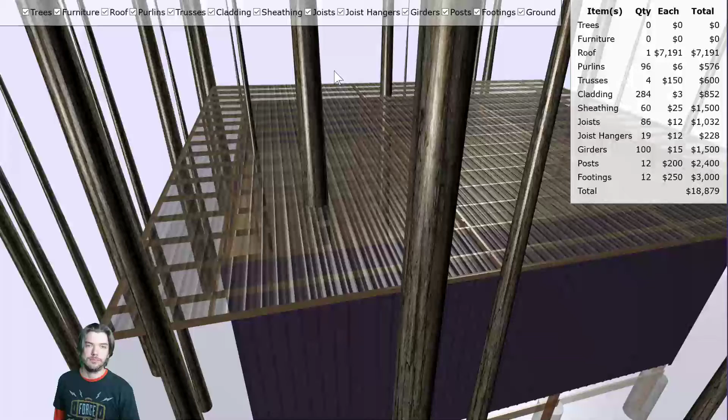When I estimated in my head what my material costs were, I said 15 to 20,000, and after I thought about that, I couldn't believe that that's what it would really be. I thought maybe I had seriously underestimated, but you can see on the screen, 18,879. When I saw that number, I thought, whoa, that's so close. I don't even know how I knew what that would be, maybe just kind of tallying it all up in my head and figuring these things cost this much.

I got an estimate for a pole barn from, I think, Hansen, and it came in at about 14,000. The materials I'll be using are going to cost a little bit more, and I'll be buying each one. They probably get a discount. So I don't know, it came out to be about right.

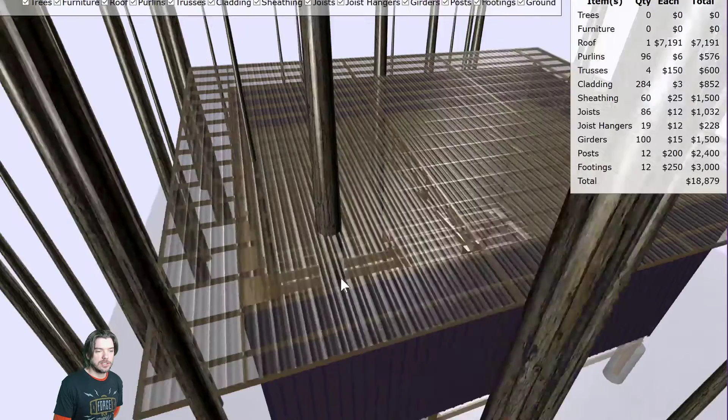Now, of course, there's still a lot left to be calculated. I don't have the flooring in yet. I also don't have insulation, or doors and windows, or plumbing, electrical, all that. So the price is going to go up beyond this quite a bit. But it's incredible that you can build something so big for what doesn't really seem to be a big amount of money compared to what it would cost to buy a house. So I'm pleasantly surprised by this number, and, I don't know, it sounds immodest, but impressed, like whoa, all right. So I think I'm on the right track.

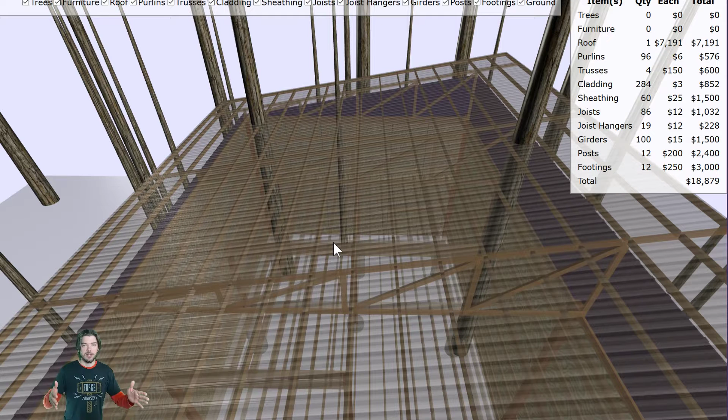I don't know what this would have cost to build using traditional building methods. I know for one thing, the foundation would be quite a bit more expensive. A full perimeter foundation would likely cost at least 10 grand, I'm thinking, because you have to trench the whole thing very deep and wide, and then you have to fill that with concrete. You have to hire pumping trucks to come in and put the concrete in there. So a full perimeter gets quite expensive. Plus, a full perimeter foundation would be really bad on the trees around it.

I'd have to cut the trees back really, really far. But I decided I'm either going to do just a regular pole barn and have these concrete footings you can see here, or I might use what's called a diamond pier. Let me see if I have a window for diamond pier up. I'll get it for you. Give me just one second.

So these are diamond piers here, and it's really neat. What they do is, each one of these... notice the pins here, they actually pin them into the ground. So you have these concrete blocks, and then inside each of these holes, in 4 different angles, you basically use a jackhammer, just like in the picture, to pound these pins into the ground, and that keeps them from moving. The pins are kind of like this, say, and the block would be here, so it can't move like this. It's pretty cool.

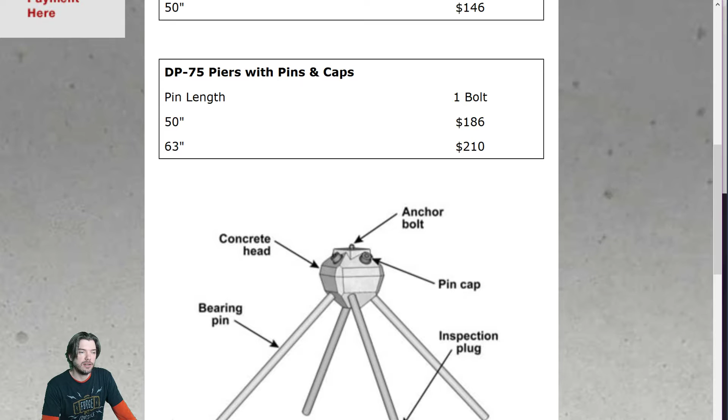So how did I come up with the pricing? Here, on the most expensive residential one, I might have to get something bigger than this, but here is $210 each, and I'm gonna have one for each post. Commercial pricing is a little bit more expensive. I'm not sure if I'll need to go here, but a pin length for a DP 100, here's about $250. It might go up a little bit more. And then in the code, what I did, I put a cost for each item in the check boxes at the top, and what the price will be. And here's the link to it. So the trusses I put at 150. Let me show you that page.

Security check. Seriously? Weird.

So the truss is here, a 24-foot truss. I mean, it says 74. I'm going to have a shed roof, which the pricing might be a little bit different, but at the same time, I thought if I overestimate there's only 4, so if I overestimate even by double, that should be okay. I can live with that.

Let's see here for cladding. I wasn't sure on that. I might need to change that, priced quite a bit. Board and batten siding. Will it load? Doesn't look like it'll load.

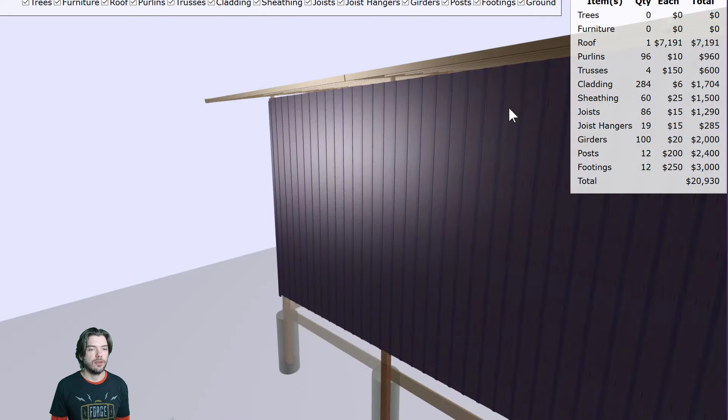I need to add another number in there for the labor. 21,000. Okay, so a little bit more. Now the labor generally is double the materials, so for about 40,000 I could get this structure built, I think.

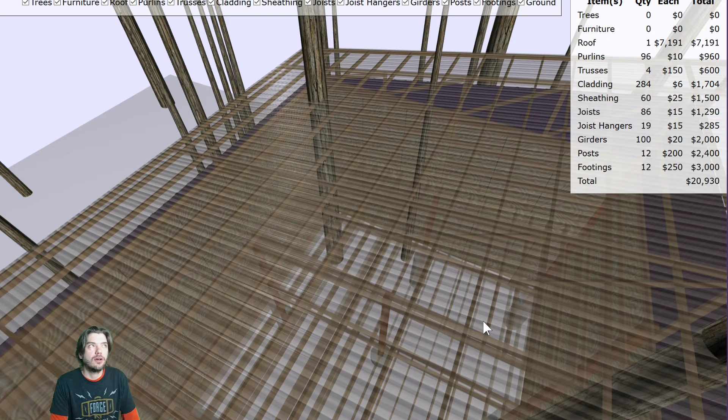What's that number? $1,200? No, half that, about $750. Another $750 for plywood floors. Plus more, actually. So let's say about $1,000. So $22,000. And then, I mean, you could live in that.

You wouldn't want to live in that. You wouldn't have a toilet. That wouldn't be nice. You wouldn't really have electricity. Maybe if you had a grill. It's better than camping though, right? Maybe get a porta potty outside until you get the plumbing in there.

So I need to know what the plumbing will cost. Not really quite sure what that. It's going to be very simple though. There's going to be a kitchen sink and a bathroom sink, and a toilet and a bathtub. So really only 4 fixtures. That's not really going to be. Should I have a bathtub or just a shower? I'm not sure. It's kind of nice to have a bath every now and then.

All right, and then let's see here. Trusses, right? Purlins. These are the purlins.

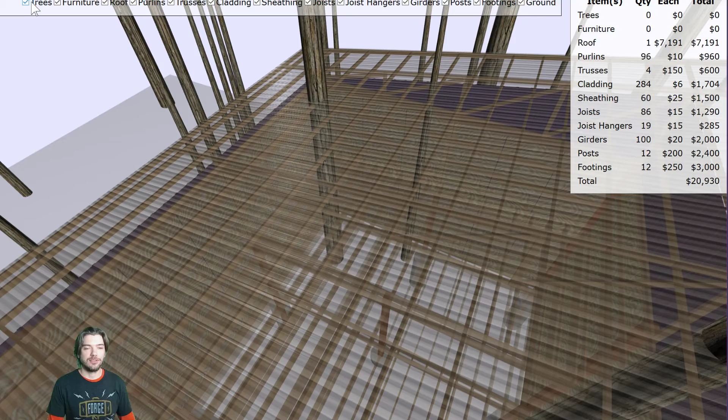It's weird. It's like every time I get closer to the real house with the virtual house, I get a little more anxious to actually build it. And it's so strange. I guess in a way it's good to slow down.

I realized yesterday too my trusses aren't being built right. But I don't have any control over those trusses. I'm going to have to buy them pre-engineered. So as long as they're there, it's fine. I could, of course, not build this second floor. Then it'd be just a really tall space.

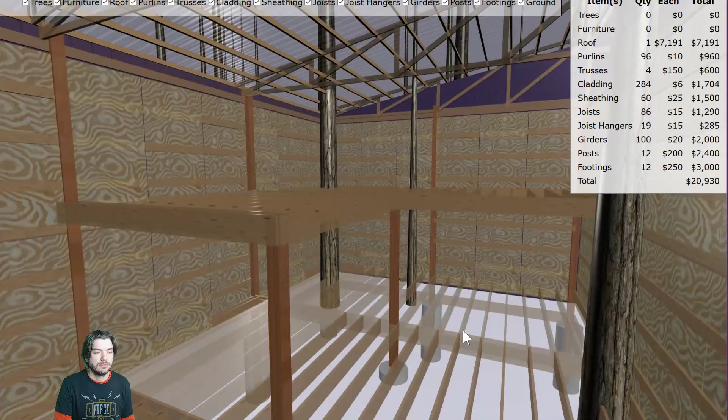I feel like you have to build your own house in your life. I feel like that's a requirement in order to be a human being. Maslow's hierarchy is, at the bottom, shelter. And we go through life living in these houses, just letting somebody else build them for us. We don't even know what goes into building a house, or what it takes to build the thing we're living in. How complicated is it? What is it?

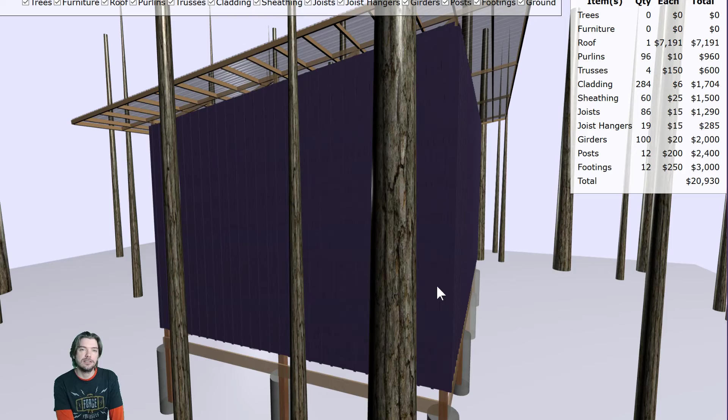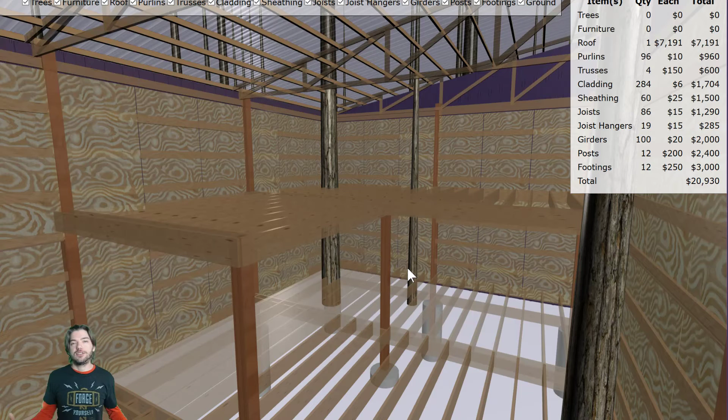I think it's going to be really nice. I've renovated a house, so not knowing what's behind the walls, or having to deal with somebody else's mistakes and shortcuts - I mean, there are always those there. It's the same in programming, really. It's really similar to programming in many ways. We even have analogies in programming, like 'I just got to plumb it together' or 'I need to wire it up,' or software architect versus traditional architect. Both are called designers.

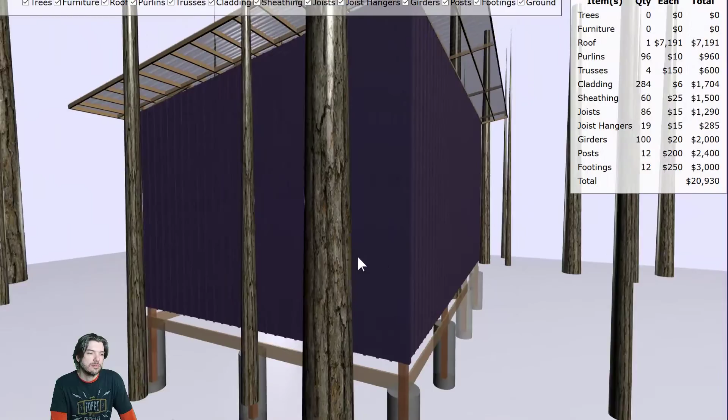I guess I need a door. Door's about $300.

My goal is I want to design a house that will cost about the same to build as a typical down payment, because that's what people generally save up, right? So if they can generally save up a down payment to buy a house, then what if you could actually build your house with that?

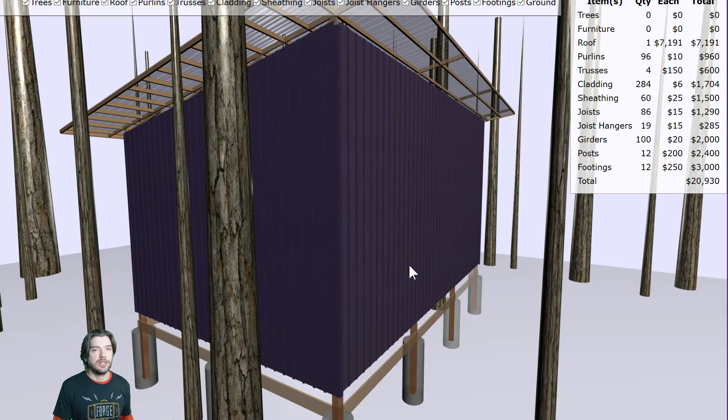Assuming, of course, you put in your own labor. And you have to buy the land as well. There's a bunch of other costs here too. Oh my gosh, it's so expensive. Houses are so expensive. I have to get a septic system, I have to get electricity put on there, I have to get water.

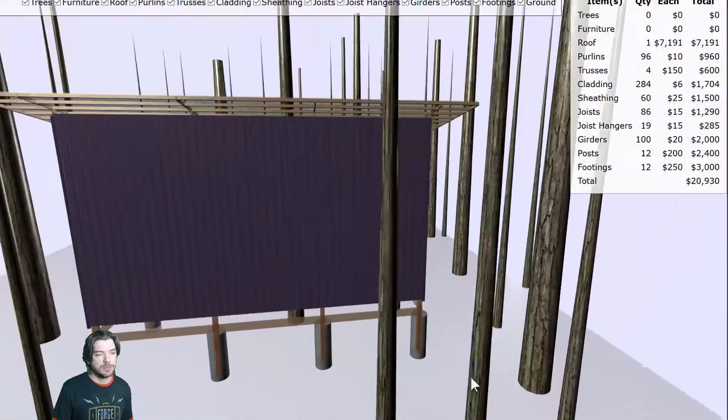Maybe I should add an item for each of those. Where I am, water's really expensive to get. And a septic system is about $15,000. So it's expensive.

Houses are really expensive. The roof is the most expensive part, which I guess is important because it protects the entire house. And a metal roof is going to cost a little bit more. This is for the metal roof cost. Where did I get my metal roof cost? Let me find that. Roof.

Will it open? So here we go. Typical roof costs run from $4.50 to $11 per square foot installed. So metal roofing costs range from $150 to $550. I took the high end of the range there. I knew it was going to be - roofs are really expensive. But metal's going to be the best, especially in an environment like this, Pacific Northwest.

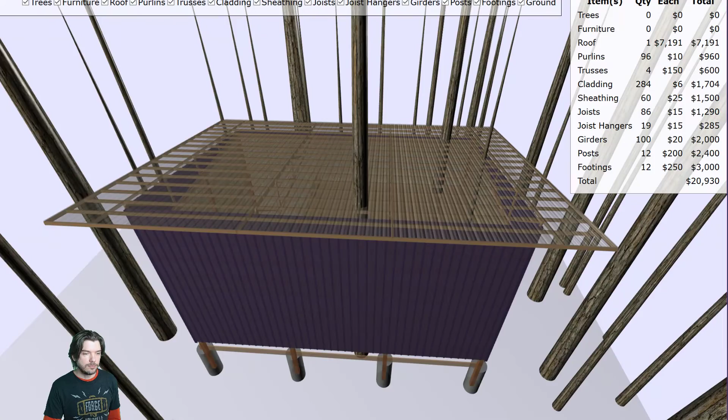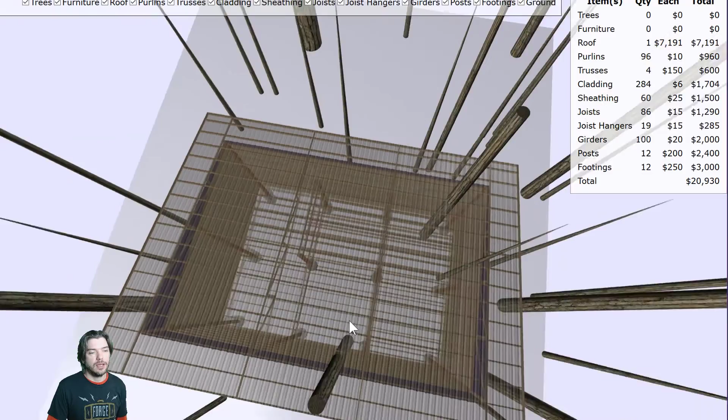Do I have anything else to say about this? I don't think so. So now I need to get my... oh, flooring's going to be really expensive too. You know, $5 a square foot, more if you consider the plywood underneath it. And then insulation as well - I think my insulation's going to run about $8,000. I just did a quick estimate the other day. So, you know, a lot of money.

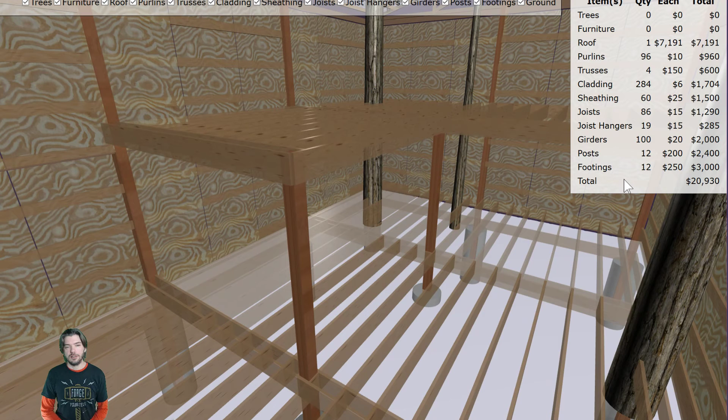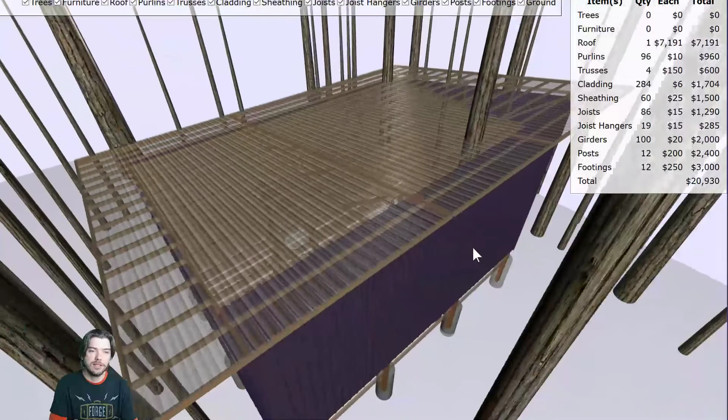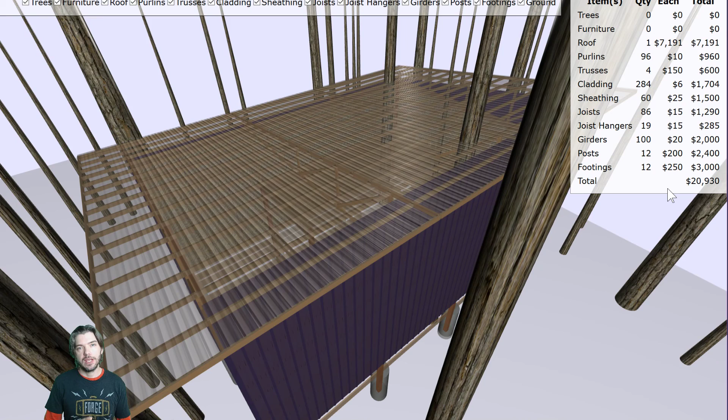Well, that's it for today. I am happy with this news. So 15 to 20K is about right. I'll get my subfloor in, and I'll get my flooring in - maybe I'll go with cork. And then I'll add electricity and plumbing to the list just as an estimate, just to see what it is, and then also septic, water, and electrical utility hookup, to get a little bit closer to the actual number. But this is an encouraging number, and I'm happy about it.